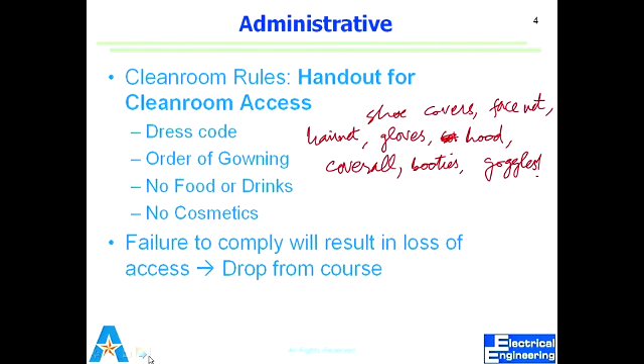Right, so take your time. If you have any questions, always email us. We can get you on the same page on the gowning and cleaning process, or on the preparation. How do we go inside and how do we get out? Why do we do all that? To maintain the integrity of the clean room.

First, the question is, what do we mean by clean? Clean is, we don't want any of the particles from outside to go inside. So we want to restrict the size of particles that are in the air, because they will contaminate the process, the devices, the wafers. And there are limitations on all the things that we can or cannot do.

There are three basic types of contamination: physical particles which may land on a surface, films, or trace elements. So some are visible, some are not. We can see particles. How do we see particles? Look at them. Which microscope? Just hold the wafers and look at it.

But what is the smallest size that we can probably see with bare eyes? 10 microns maybe? Yeah, about 5 to 10 microns is what we can see. If it's a line, we can see 5 microns easily. But if it's a speck, a particle, you probably won't be able to see that.

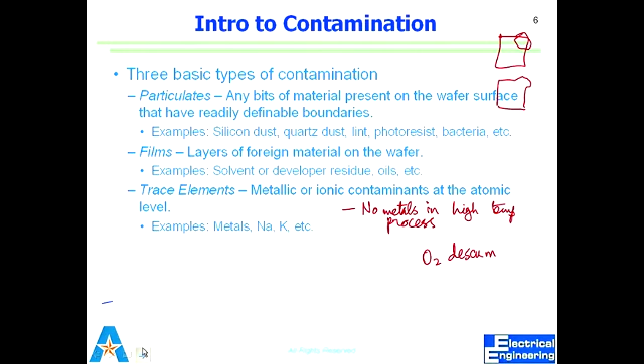So what are sources of contamination? The equipment itself, because in any given equipment we have a number of gases coming in, reactions happening, products coming out of that reaction, and we have to remove those products. Some of those reactions may be highly corrosive. They might react with the material of the chamber, with the material of the encapsulating container of the equipment itself, right?

So most of those chambers are inert for the reactions we do in there, but there is always some sort of etching or deposition happening. It may not just remove the surface material, it may deposit something there, which may become an issue when the next person uses that equipment. Those deposited materials might degrade the next process. Liquids and gaseous chemicals: gases flowing through, liquids going through, they can carry those contaminants.

People are a major source of contamination because we are always inhaling, exhaling. We have particles, things coming out from our skin, which can be a major issue for devices. Devices are small, they're smaller than a micron. Chemical and wafer containers, the containers that we use to move the wafer around. In your case, it would be your tweezers, because you'll be holding your wafer with tweezers. So if your tweezers are not clean, it's gonna screw up your wafer.

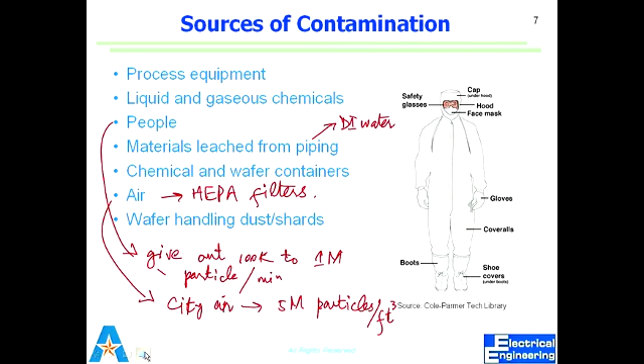What can films do? So, you guys moved out of apartments and cleaned the grease from the cooking range. It takes an effort, right? Some of you have been here less than a year, haven't changed an apartment yet, but when you clean the cooking range, the stove, there is grease, right? You have to use certain chemicals to remove it, but some are hard to remove.

Same way, the reactions that we do, some of those reactions result in films. When they get deposited, it's very hard to remove them.

We'll get some tissue. Contamination. Thank you. You're contaminating the classroom. Coke is corrosive or not?

Not corrosive. So those films can ultimately result in degrading the cleaning process. So if you want to use a run-of-the-mill standard cleaning process, it might not be effective. If you want to do an aggressive cleaning process, it might affect the features that we have on the wafer. So they become an issue in cleaning.

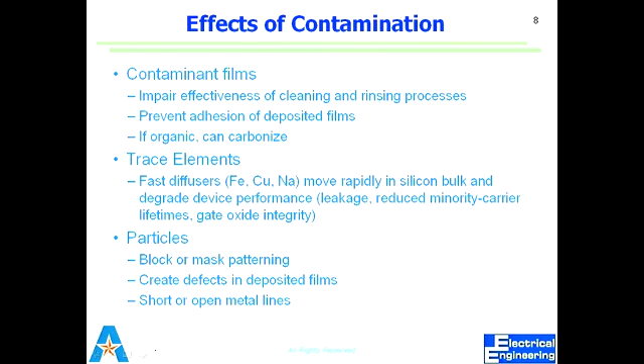So if I had a square here which I wanted to transfer, it can ultimately result in defects in the films that we deposit or lines that we make. So it can degrade the features that we make. And we defined the size of particles that are killers. They are how much? 20 to 50% of the minimum feature.

Now there are a few new terms here. What is minimum feature size? As a designer, I make all sorts of components, resistors, capacitors, right? Channel length, source and drain. There is always something that is smallest in feature size, which I want transferred faithfully from mask to wafer. That is the smallest feature size, and that will define what technology, what node I will use, so to speak.

Like we discussed, there was the 65 nanometer node, and that minimum feature size will define what particle size can be allowed in that room. So even if we call it a clean room, it always has some particles, but we get rid of most of those above a certain size, and that defines a term called class. Class 1000 clean room, class 100 clean room, class 10 clean room, right?

So what does a class tell us about a clean room? How many particles there are? How many particles are in there, right? Not exactly. How many particles of what minimum size would be in there. So it's not just how many we can clean, it's what size we really want to get rid of.

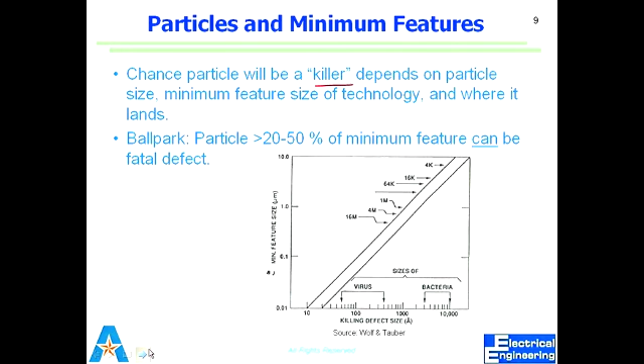Then from the air we want to measure temperature, humidity, chemicals. If there is a leak in some tubing, that chemical will end up in the air of the room. We may not be able to smell some gases or feel them, but we have sensors that look for those. So that air is not just filtered, it is also sampled for all these things.

So if we're actually smelling chemicals in the clean room, does that mean the clean room is not as clean as we think, or are the particles we smell too small to matter for our devices? Hold on. Do we smell things in the clean room? No, what I'm saying is if the clean room is filtered n times per minute, we shouldn't be smelling any chemicals, right? Or is the filtration for particles? I see. Not for chemicals. Right. Can you filter chemicals out of air? You can, probably not easily. You can absorb them, but filtering, no.

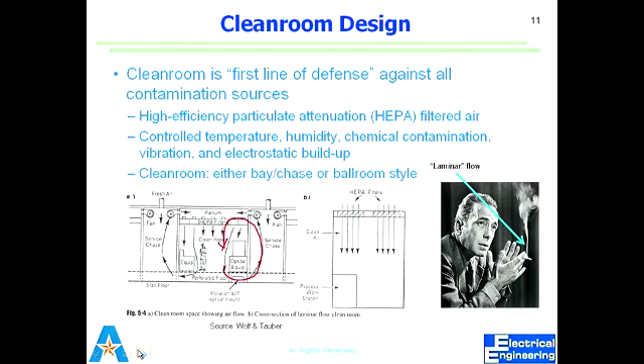So this is ballroom, and bay and chase, where you have the cabinets and controls all in one part, and then the next one is where you have the front end of the equipment, all the machines, and the same repeats. So this is where you have the microscope, everything, and the chase is where you have all the auxiliaries for that equipment.

As I said before, within the clean room we have further smaller, cleaner environments. Your tweezer goes into a case. It can be a test tube. You guys have seen test tubes in high school chemistry. If you put a cap on the test tube, you can use that to store a tweezer. I always used to do that when I had a tweezer. Of course you clean your test tube before you start doing that, and then you put a cap on it. Now you can put that tube anywhere. Your tweezer is not coming in contact.

Similarly for wafers, we always put them in a container. We never leave a wafer unattended unless it's in a box, closed tightly. We don't move a wafer by holding it in an open environment from one place to the other. We always put it in a container, close the container, and we move the container.

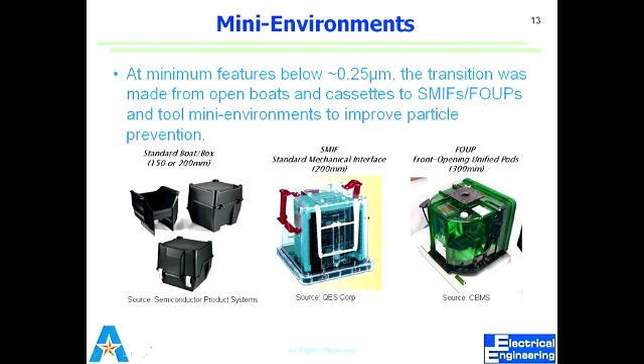So this is on the clean room. So it's particle size and the total particles per meter cube. That is what defines class 1, class 10, class 100, class 10,000. So it's not just how many particles, it's the size of particles. So if we push down to the smaller particles, we are a little bit relaxed on how many particles can be allowed, right?

So what class do we have here? What's the class of our clean room? 10, 100, right? 1,000? 100? 100,000? Some parts are 100, some parts are 1,000. What is the teaching lab? I think it's 1,000. It's 10,000. Right?

And then we go all the way to what size? 0.1 micron? How much is 0.1 micron? 100 nanometers, right? How many do we allow? 10 raised to power? Wow. A little close to a million, right? As the size goes small, it becomes hard to filter that.

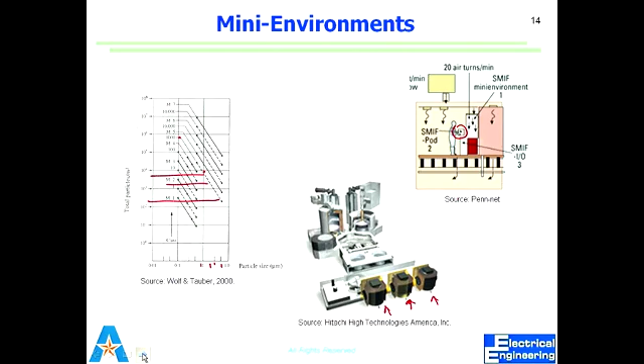You guys have seen this rule, AAA, right? AAA: Always Add Acid. What does that mean? Never add water to acid. If acid is supposed to go into some solution, we always add the acid. We never add something to acid. Make sense? Because if you do that, then you have the whole acid mass to start the reaction. It blows up. So we add acid, so the reaction continuously takes whatever speed it has to achieve.

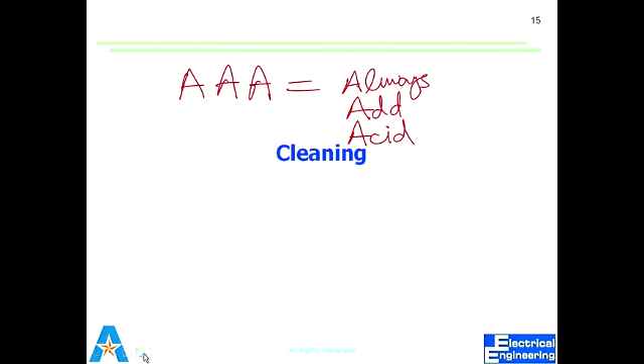So how do we clean things? We all agree we need to clean. Yeah, we have to stay clean. I don't mean that, but we have to keep the gowns and our receptacles, whatever we use, clean for reasons that we have discussed. How do we clean all those things? Okay, why do we want to clean? A quarter of steps in a fabrication run are just cleaning. We take the substrates out of one process, we clean. So many times we have to clean, which is a necessity.

We might have done some reaction with an alkaline solution and we want to neutralize it. What are alkaline solutions? pH greater than 7. Basic solution, right? KOH, potassium hydroxide. Potassium is considered a metal. It can degrade the device if it seeps into the substrate. So before I do any high temperature process, I want to neutralize any potassium on the substrate. So cleaning is not always just cleaning; you have to neutralize chemicals that might have come in contact with the substrate.

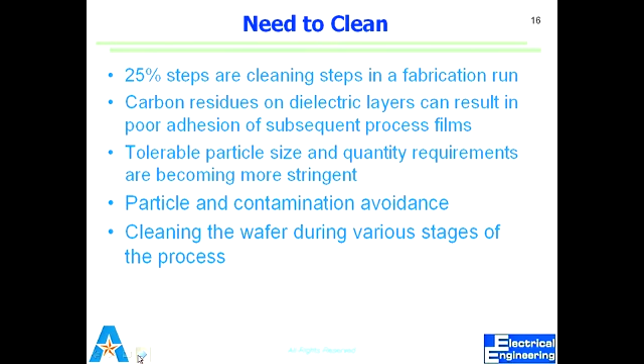It can be carbon left over from polymer from some reactions which happened before. It can be particles, films, oil. So we clean after almost every major process. And water is one very important agent that we use for cleaning. But water itself is not clean as such. We have to clean it. We have to deionize it.

What are the things in water that can be a problem for processing? Of course, ions. Deionize means you want to get rid of ions. What else can be in water? Salts? Yeah, with deionization, salts become ionized. You can have particles, organic particles. What else? When you say clean drinking water, we're talking about living things in water. Minerals are again salts. Bacteria, protozoa, fungi, living things in water, right? We want to get rid of all these things: ions, salts, minerals, particles, living things. We got organic chemicals too now.

Organics are very important, because what is an organic material? It contains carbon, and carbon is everywhere. Carbon can make a film which becomes hard to remove. So we want to get rid of organic materials. We do on-site DI treatment. These DI water systems can be as small as a bench top or something that fills up a room, depending on the throughput and the quality that we want. The throughput is probably more important.

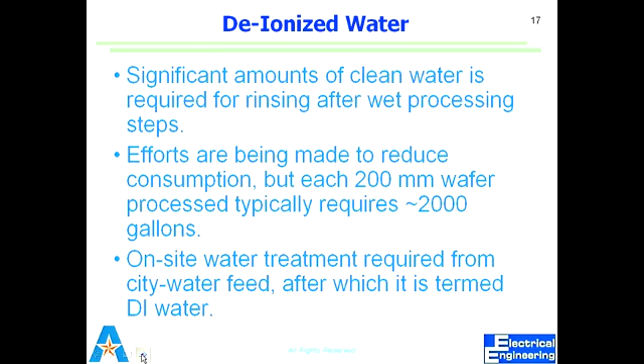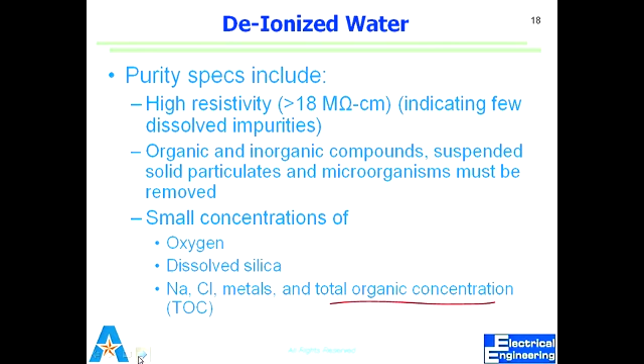High resistivity. All organic and inorganic suspended solid particles, microorganisms should be removed. There are gases in there you want to remove. Oxygen, silica, metals. What we call TOC, total organic concentration. And there are specific numbers that it has to be below. So a whole lot of processing has to be done on the water. We want less than 10 parts per billion of TOC.

And where do they come from? Naturally occurring microorganisms, organic matter, man-made organic based chemicals. All sorts of things are there in tap water, which is good for drinking, not good for processing. Why 2,000 gallons per wafer? I mean, we're not going to use that much water in there, are we? We'll see how much you're going to use.

Yeah. At the end of every cleaning process, there is something called DI water rinse. DI water rinse is where you hold the wafer and you put it in flowing water. You rinse it. So the book says mostly a 5 minute rinse. So it means your tap is running for 5 minutes just for one wafer. In industry, of course, they have the cassettes where you are flowing water to remove whatever is there.

Does it take more than a gallon of water to make a gallon of DI water? I have no idea. Look at the specs of the DI water system. They should have this information.

So what we want is to remove particles, remove bacteria. How do we kill bacteria? How can we kill living things in water? Heat it, right? But there are organisms that live in hot springs also. We know those all over the world. They have these springs which are hot water, sulfur. They have living things in that water as well. Pardon? Using some chemicals. Chemicals. Right, then we'll have to remove the chemicals.

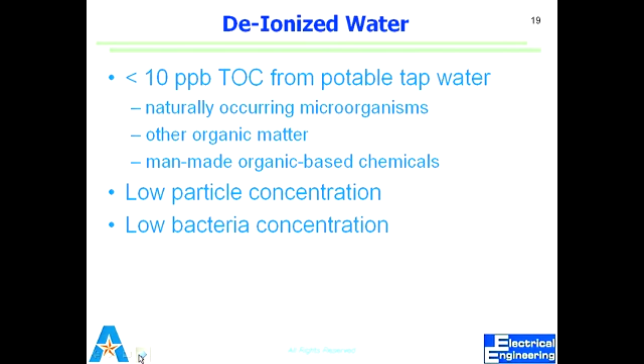UV is the easiest way to kill living things, right? That's why we have these glasses that protect from UV and sunscreen which protects from UV, because UV results in mutation of DNA, and ultimately kills the thing. So UV is something that we pass the water through, and then we filter. What it does is it changes the organic matter. Living things have lots of organic stuff. It results in carbon dioxide and water.

So for bacteria, what we aim at is less than 1 CFU per ml. For bacteria, the unit is CFU per ml, colony forming units per ml. So if they are not killed, just filtered, some of them would pass through and start forming their own colonies. So bacteria are counted as CFU per ml. So we want to do that to destruct ozone as well.

What is ozone? O3. What is good or bad about ozone? What is good about ozone? It absorbs UV, right? What happens when it absorbs UV? It breaks down into simpler units, oxygen. But it's highly unstable, which means it reacts easily.

It corrodes the piping. If it corrodes the piping, we can use it to clean the piping as well, because something that corrodes is going to take away material from the surface of that pipe. We want to control how much we clean. We don't want to eat away the pipes. So we want to remove ozone, but we also want to use it as a system sanitizer, a controlled amount of ozone. So that's also something that comes with water.

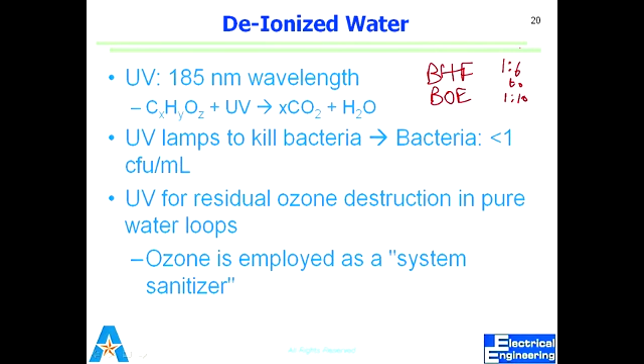And you'll read another typical phrase, copious amount of DI water, which means a lot of DI water that can neutralize the reaction. So it's just one example. For many reactions that we do in liquid, the first thing is to take it out and put it into a beaker with DI water, so we can stop the reaction, or at least retard it to a great extent. So that is for the DI water. We use it for rinsing and for stopping reactions.

Where else do we get contamination from? During processes, we do deposition. Deposition is done where you might be physically depositing something or reacting some compounds on the surface which result in material that gets deposited. So it might have some byproducts which we make every effort to suck out from that chamber, but some of that can get back on the substrate, get back on the liquid. Some of that can stick to the walls.

We will be going through this over and over. When we go into chemical vapor deposition, we'll look at this again. So if you feel that it's too much knowledge and it's new, yes, but we'll see it in many places, so don't feel overwhelmed. Almost all processes will result in byproducts, whether it's chemical vapor deposition, CVD, or etching, where we pump in certain gases which etch away certain materials, and they may cause flaking.

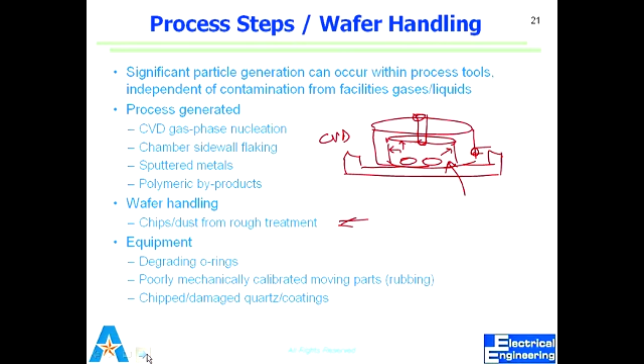It can come from the handling of the wafer, from tweezers. It can come from the gas O-rings or parts that move. So there are many places we can get contamination from within a process. They can not just deposit, they can create electrostatic charging of the surfaces as well. And if you don't clean the chamber... cleaning is not always a manual process where you have to wash the dishes. You can just put the dishes in the dishwasher and turn the button on. So there are processes which are clean processes.

Especially remember that oxygen is always a very strong cleaner. Wherever there is oxygen involved in a process, it's a vigorous process. So to clean a chamber, we do a process called oxygen de-scum. Scum is the formation of different materials. De-scum is removing that material. Oxygen de-scum is a cleaning process, and we do it very often. Many times I would always do a de-scum before I do my process. And to be nice to the next user, I will do it at the end of the process.

We don't do de-scum with a wafer inside. We do it on an empty chamber, right? So what kind of devices do we do this oxygen de-scum in? Oh, empty chamber. We just want to clean the chamber. So it is done on plasma. Any plasma system will have a de-scum recipe.

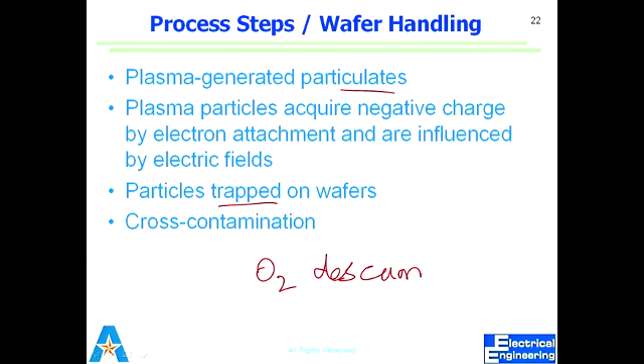Recipe means the combination of gas flow, temperature, how much power we have to provide. So before I do the actual process, I will just run that de-scum process, which will make sure the inner walls of the chamber are cleaned up. And then I will open and place my wafer, and then I will do the recipe of whatever I was supposed to do. So we do this a lot of times to reduce cross contamination. Something that happened before shouldn't affect what I'm doing.

All right. How do we clean wafers? How do we clean, say, let's start with tweezers. How would we clean tweezers? Get a new tweezer. What should I do to get rid of anything? We start with something called solvent clean. Now, solvent, simply stated, is something that can dissolve other things, right? So solvents in this case we consider as non-acidic, non-basic solutions. What are those solutions which are not acids, not bases? Acetone, alcohol. So acetone is a very good cleaner, very good solvent.

What we do is we dip maybe one wafer and tweezers in a beaker filled with acetone. Leave it there for 10 minutes. It's going to remove everything. Nail polish remover has a very small concentration of acetone. That's why it can be used. But acetone is not a good solution; we don't want to inhale it. So first step is we put it in a beaker inside the solvent hood. Leave it there for 10 minutes. Now, once I take it out, it's going to dry off. Acetone dries off very quickly. It will have residues of acetone on it.

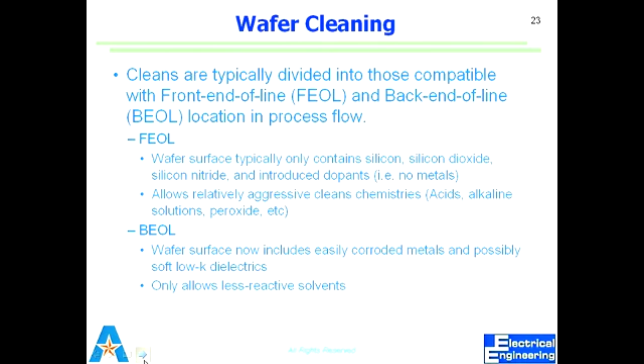So front end is where we have nothing, we just have simple silicon or maybe silicon dioxide. We don't have too many layers made yet, not too many metals deposited. It's called front end of line. We have much more room for what we can do, right? We can use aggressive chemicals. But once we put metals and different layers on there, we have a very small window of what can be done, and we can only use less reactive or, so to speak, tender reactions.

So for front end of line, a very popular one is called Piranha clean. Piranha is a mixture of hydrogen peroxide and sulfuric acid. From your experience or knowledge, tell me what happens when you mix acids and bases in equal amounts.

What do you expect? They neutralize each other? Okay, that's least of my worries. They release heat. There will be a lot of heat involved. Lots of heat, explosion. They will blow unless I add acid in the reaction, right? So my question had a basic flaw: what happens when you add them? It's going to be a big explosion, very, very exothermic reaction, unless I add acid to hydrogen peroxide, right?

Now, if I have 1-to-1 of both, or if I have 1-to-3, three times of sulfuric acid, which one is going to be more aggressive? 1-to-3 or 1-to-1? Okay, let me say it again. If I have 1-to-3 and three times is sulfuric acid, H2O2 to H2SO4, 1-to-3.